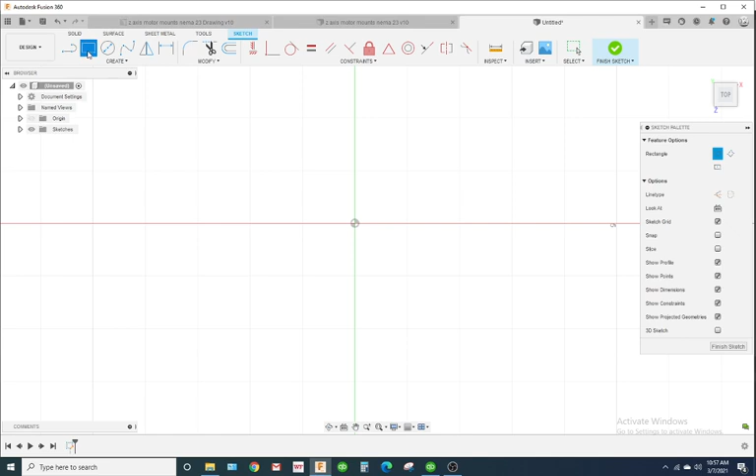Now there's many ways to draw this up. We're just going to pick one and go with it. So we got 2.5 inches by 3.937. So I'm going to create a new sketch. I'm going to pick a plane. I'm going to pick my top plane. Go to rectangle. I'm going to reference off my origin. It's going to be 2.5 inches by 3.937.

We'll double check that. 3.937. Alright. So the overall height is 3/4. Now these legs right here are a 1/2 inch tall. So that means this base is a 1/4 inch thick. Alright.

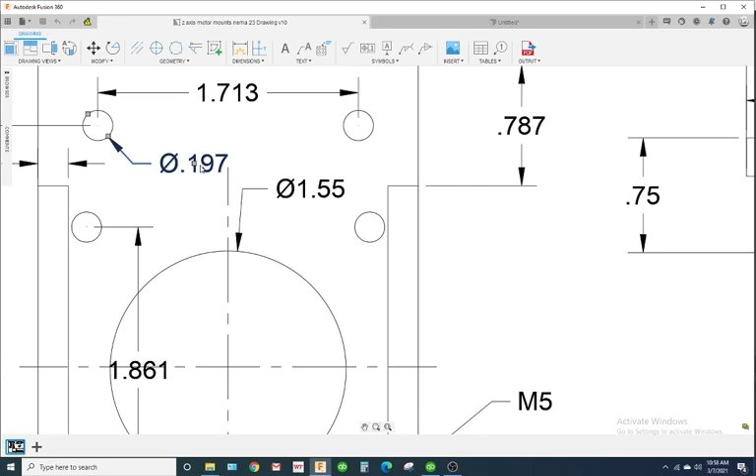We have 2 sets of hole patterns. The first set is on the very top and the very bottom. They are 5mm diameter or 0.197. So we got this one, and the ones at the very bottom. Alright. So these actually mount to the frame right here. The four M5 holes are in the middle. They mount a Nema 23 motor to this plate. Okay, so these are M5 holes.

Let's see. Let's make this M5 four times. And this 0.197. That's going to be 4 times. It lets me do it.

Okay, so there's different ways we could draw this. These 4 holes in the middle, you could actually use a circular pattern for that if you wanted to. So you got 1.861 by 1.861. We're going to use our mirror tool. What we're going to do is we're going to draw this hole and this hole right here, and we'll just use our mirror tool.

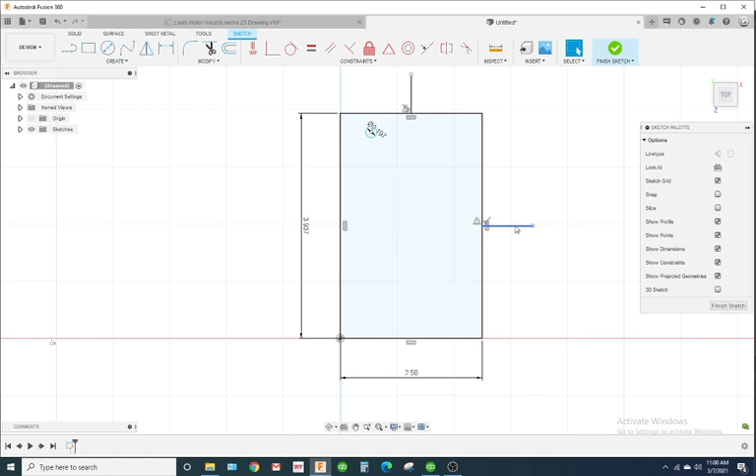I'm going to hit escape to deselect those. Now I'm going to select it, hit X. I'm going to click on this line, hit X. That turns into a construction line. Alright, so 1.713 apart. So I'm going to hit D for dimension. Oops, hit escape. Okay, D for dimension. I'm going to select this hole. I'm going to select this construction line. 1.713 divided by 2.

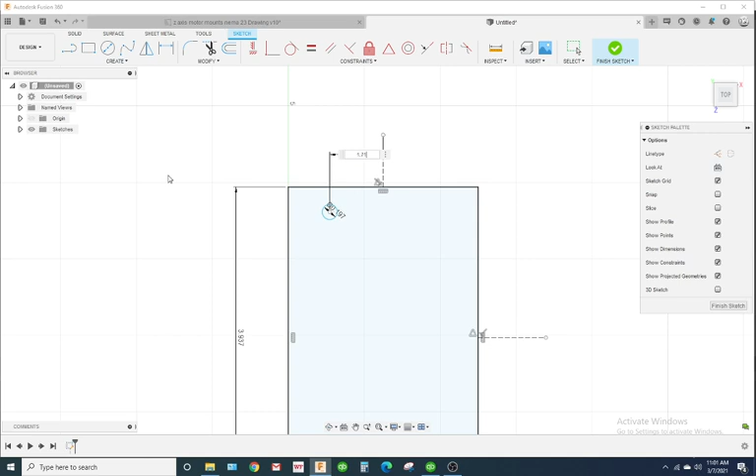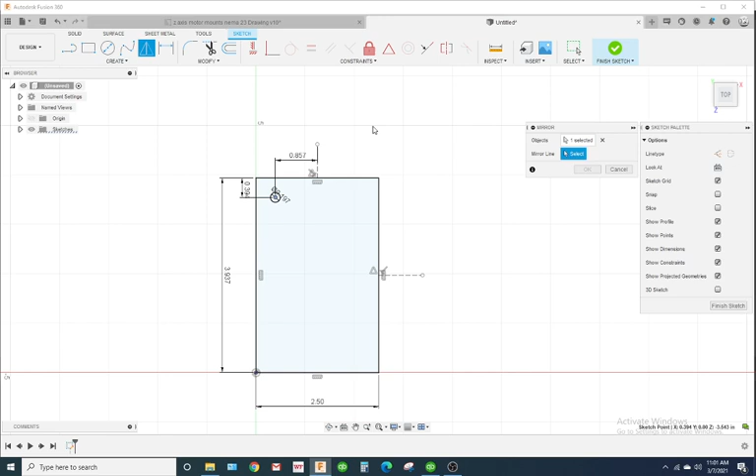And it's going to be 0.394 from the top. Alright, so I'm going to just draw that one hole. And now I'm going to use my mirror tool. So my object's going to be the circle, mirror line. It's going to be right here. Now notice the preview it's giving me is just a point. I was zoomed out a little bit, so I didn't actually click that circle. It selected the center, so I'm going to go back to object, make sure I select that. Now you can see the preview updated.

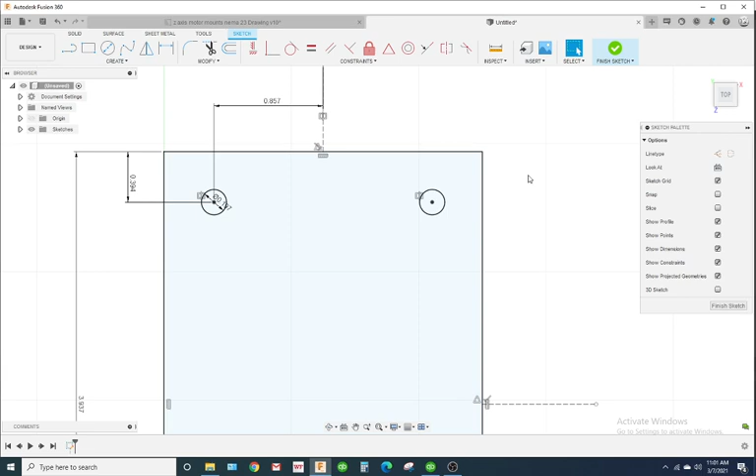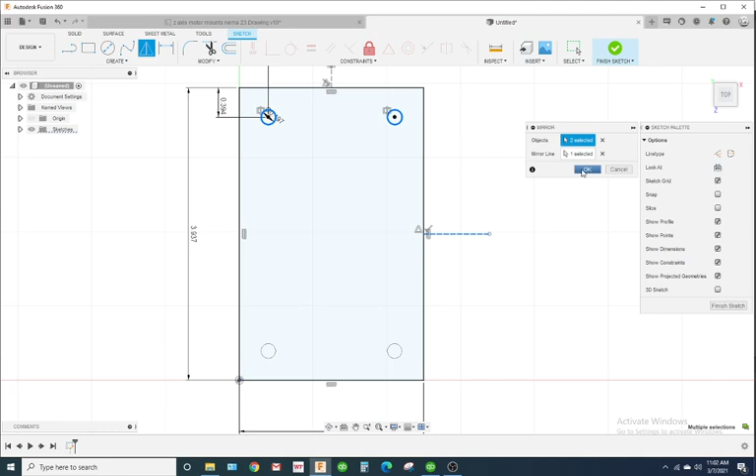Alright. So I mirrored those. And I can go ahead and mirror it and bring it down to the bottom. And same thing, look at the preview. I only have one circle here. Let's make sure I get that as an object. Alright. Now I have these 4 holes. Now everything's centered, everything's symmetrical. We got these center lines going across. So these are 1.861 apart, horizontally and vertically.

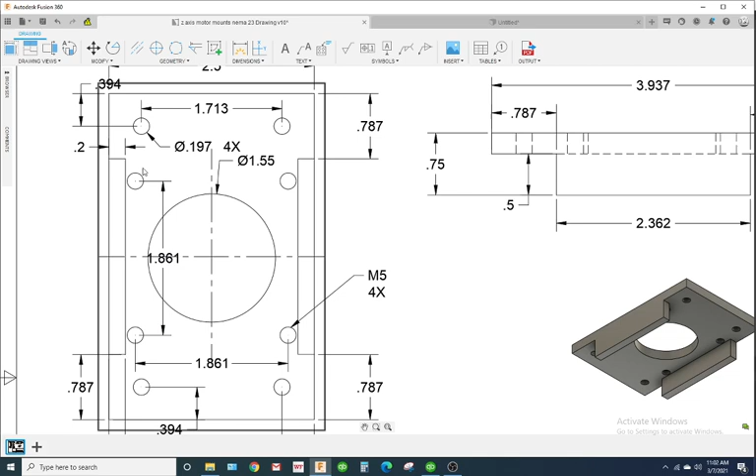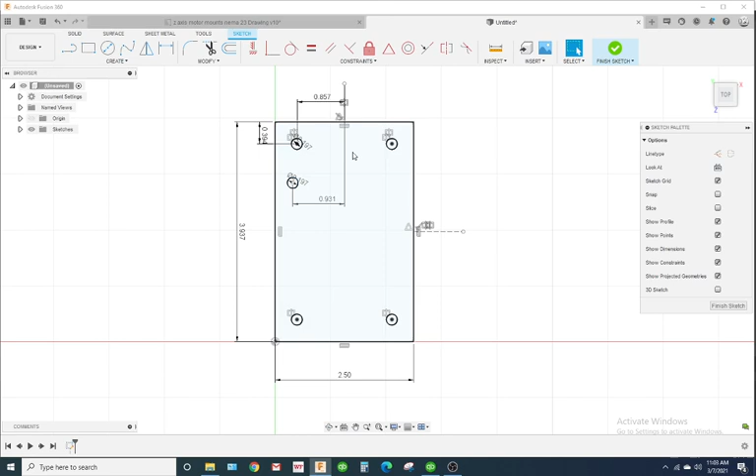So we can assume the distance vertically from here to this center line is going to be 1.861 divided by 2. Alright, so both horizontally and vertically, it'll be 1.861 divided by 2. So I'm going to draw a circle. This is a 5mm tapped hole. I'm just going to type in 5mm. And I'm going to select this center line. Go 1.861 divided by 2. Double check that. Yeah. And I'm going to constrain it vertically. 1.861 divided by 2.

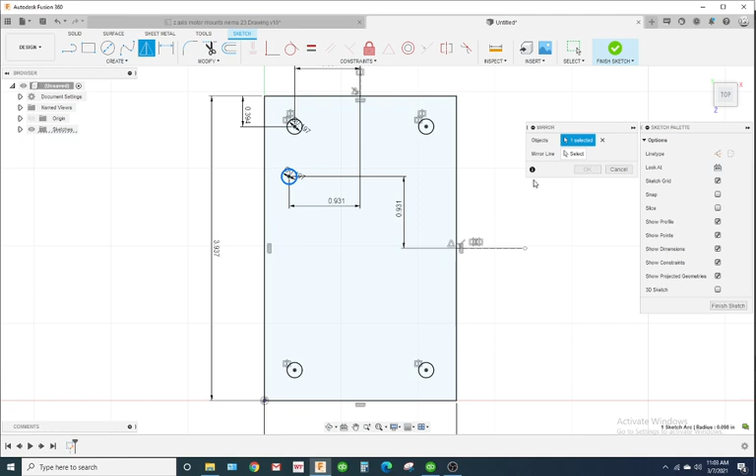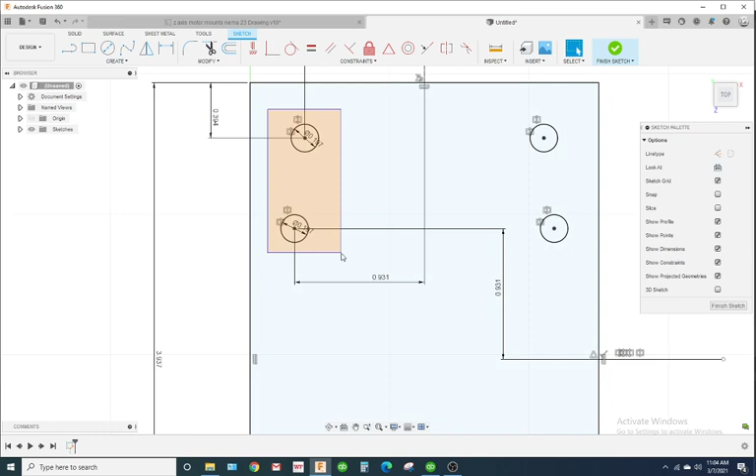Alright. So now I'm going to hit escape to exit those functions and deselect anything that's selected. I'm going to use my mirror tool. So I'm going to click on this hole as my object. My mirror line is going to be, we'll use this vertical line here. Alright. I'm going to go to my mirror tool again. Select this circle, mirror line. And hit OK. Now I could have just drawn these 2 holes and then mirrored it over here, and then mirrored everything down in one sweep.

But just to keep this demonstration, this tutorial kind of simple, I just did 1 hole at a time. But you could actually do 2 at a time. It'd be a little faster. Alright, so we're going to name this Z axis motor mount. Actually, let's name this Nema 23 Z axis motor mount.

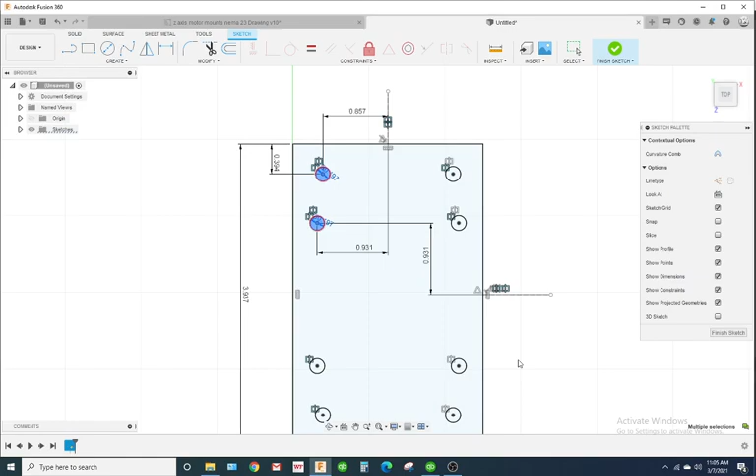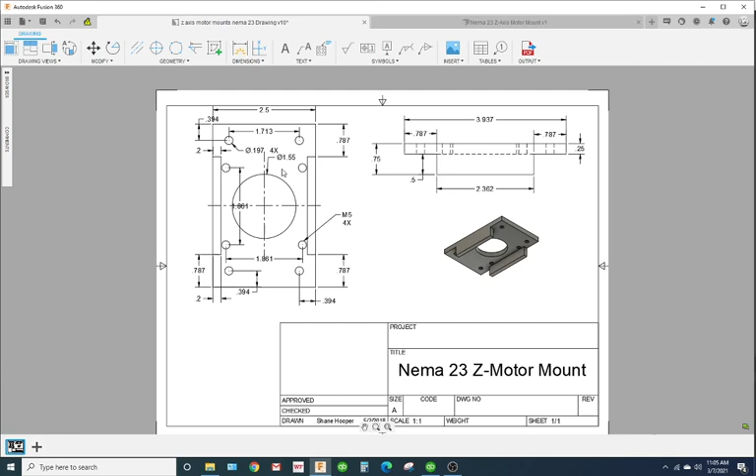Okay, now let's get our main pocket right here, or circle. This is a 1.55 diameter, and it's right in the middle of the part. So I'm going to go to circle, I'm going to hover over here, reference off that midpoint. I'm going to do the same thing here. And when I get both these,

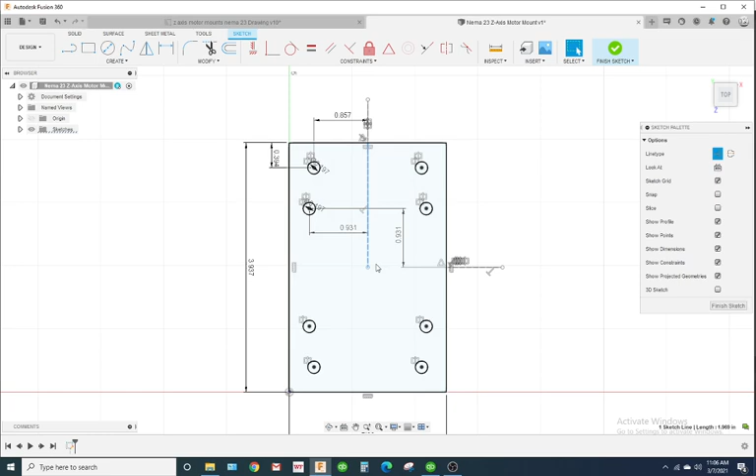okay, it's not really wanting to meet in the middle. I think it's because I'm recording this right now, so it's kind of slowing things down on my video card. So in that case, it's kind of annoying. I don't really like it doing that. I'm gonna drag. Let's see. Here, let's just do this. I just brought my construction line all the way down. Well, I added to my construction line. Alright. And you shouldn't have to do that. That's just because my computer's slowing down because I'm recording this video and using Fusion. So it's kind of taxing the video card.

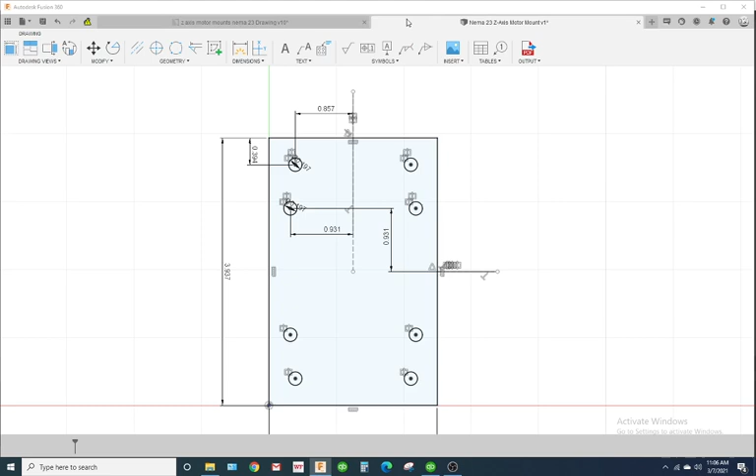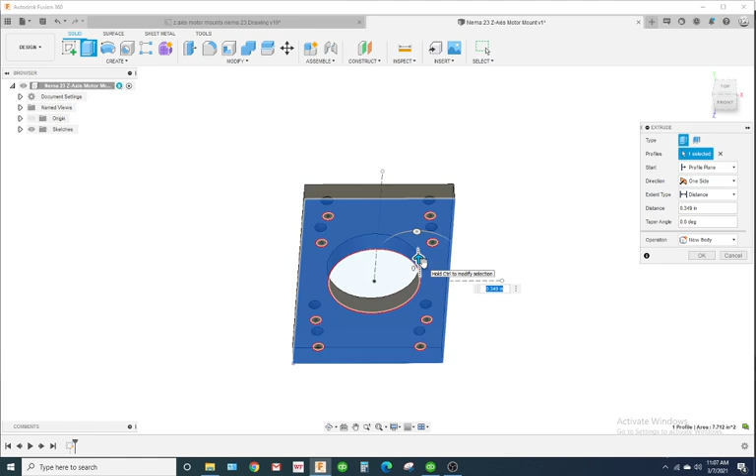So my diameter was 1.55. So I'm going to go circle 1.55. Alright. So I'm going to go ahead and extrude all this out. Just look like this. So this floor was 0.25 thick. Right? So the overall height is 0.75 and these legs are a ½ inch tall. So that means this floor or base will be 0.25. So we'll go ahead and draw the legs up.

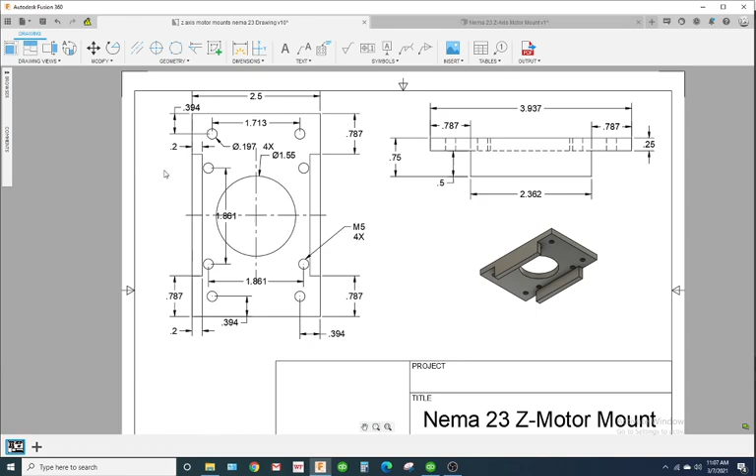So the legs are 2.362 long based off the center. Or you can look at it as the seat, this is where the mount's actually going to seat onto the frame, is 0.787 from the edge from each end, okay, and a ½ inch tall. So you can look at it either way. And these legs are 0.2 thick, alright.

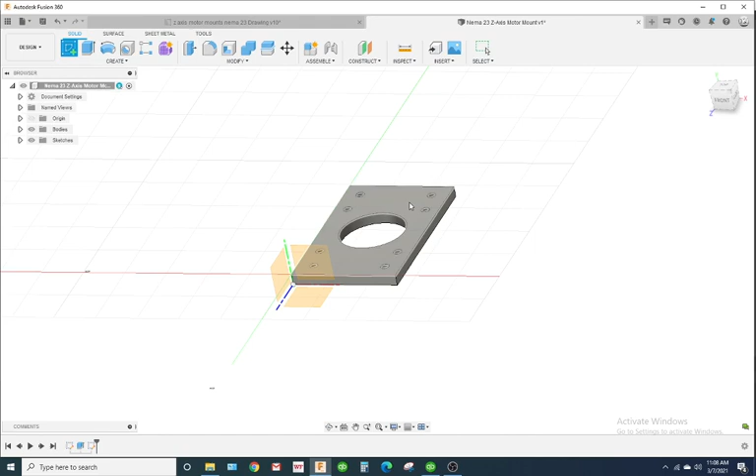So I'm going to create a new sketch. I'm going to select this plane to work on. I'm going to draw a rectangle. And we'll say it's 0.2 wide. I'm going to hit enter. What was the length, 2.362. So open this back up. 2.362. Now, it goes 20 millimeter or 0.787 from the edge, right? So we'll go ahead and constrain this 0.787. Moves the whole thing down.

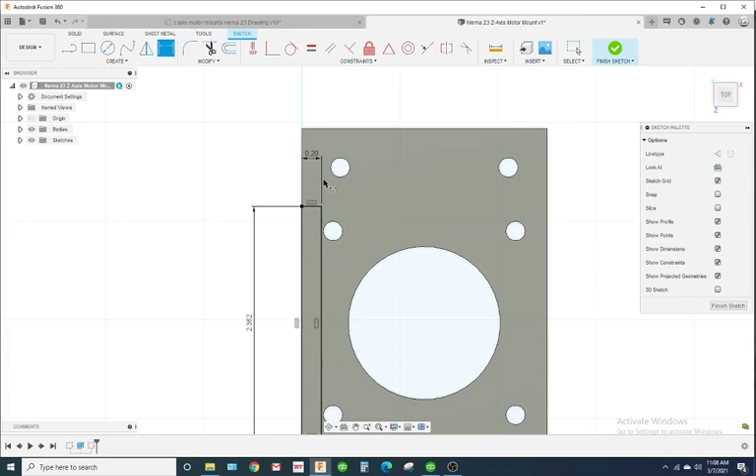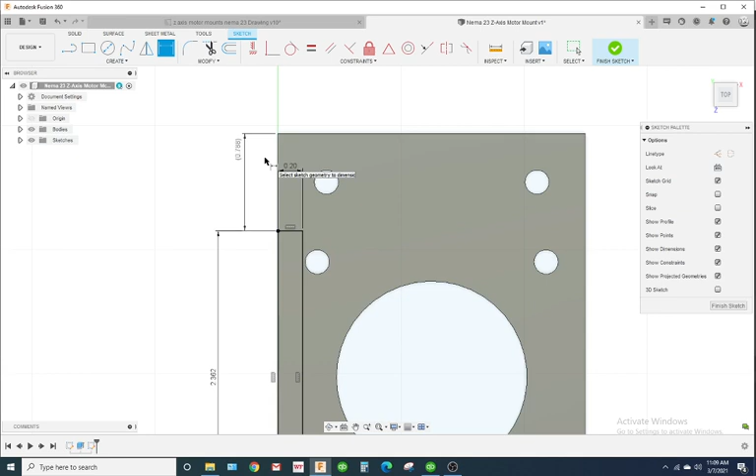Now I don't have to constrain the distance from here to here because the overall length is already constrained. The overall length of this leg is constrained, and the position from here to here is constrained. If I constrain here to here, it will be over constrained. It won't actually accept it. See, if I click it, it says adding this dimension will over constrain sketch. It's because I don't need it. If I hit OK, notice it's in parentheses. That means it's a reference dimension. It's not actually driving any of the geometry.

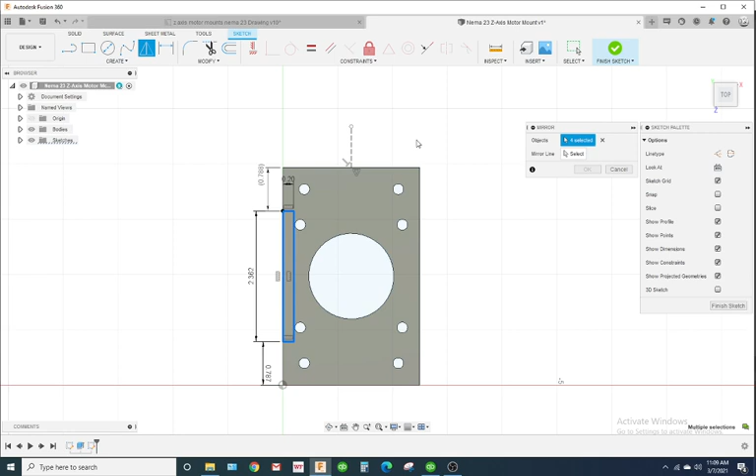Alright, so I'm going to draw the line right here and change that to construction line by selecting it and hitting X. And I'll use my mirror tool. My object's going to be this rectangle I just drew up. And my mirror line is going to be this line right here. I'm going to hit OK. And I'm going to hit E for extrude. I'm going to go ahead and extrude each one of these legs up a ½ inch, so 0.5. So it looks something like this right here.

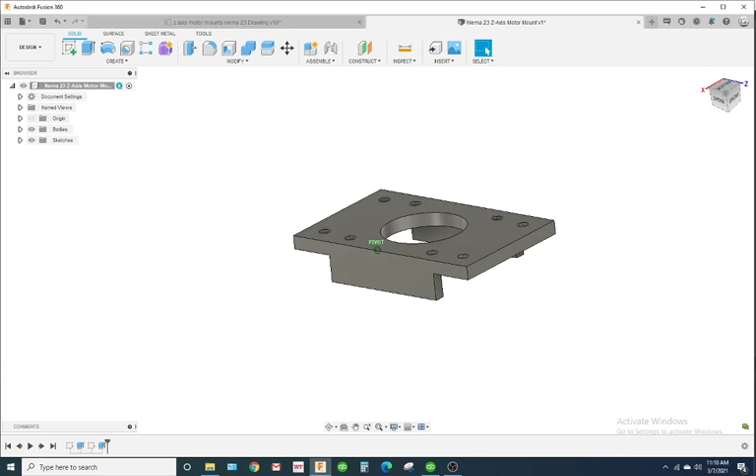These are M5 tapped holes. So I'm going to go to create, to thread. I'm going to select modeled. I'm going to select this face. And notice it gives me a 10-24 UNC. That's not what I want. I'm going to go down to my thread type as a metric profile. And it updated it. So it's now an M5 by 0.8. That's what I want. I'm going to hit remember because I'm going to do this 4 times.

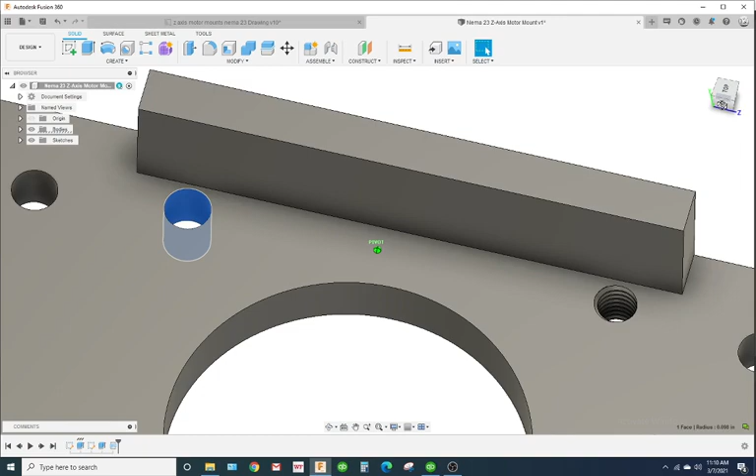It won't let me select more than one face at a time. I don't know if that's user error, if that's Fusion only lets you do one at a time. I think, let's see, sometimes you can pre-select the faces. You know, if I hit control, select more than one face, then go to create. Let's see if that still works. Okay, you can do that. You can do more than one at a time if you select them before you go to thread. So keep that in mind. Looks good.